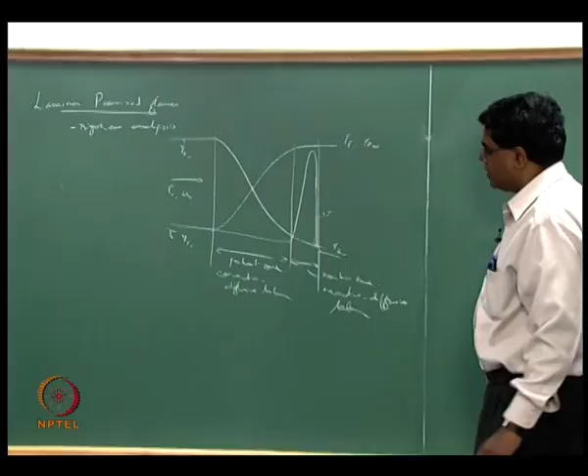So today what we will do is try to actually make a mathematically rigorous analysis of the laminar premixed flame problem. What we have been doing so far is somewhat like a phenomenological construction of energy balance and mass balance, looking at the preheat zone and the reaction zone separately. In fact, we went all the way up to even considering not only upstream diffusion of products and consequently a downstream reduction of reactant species concentration relative to the far upstream reactant concentration. We also took into account the effect of non-unity Lewis number of the reactants in trying to find out how the reactant concentration profiles are going to change because of that.

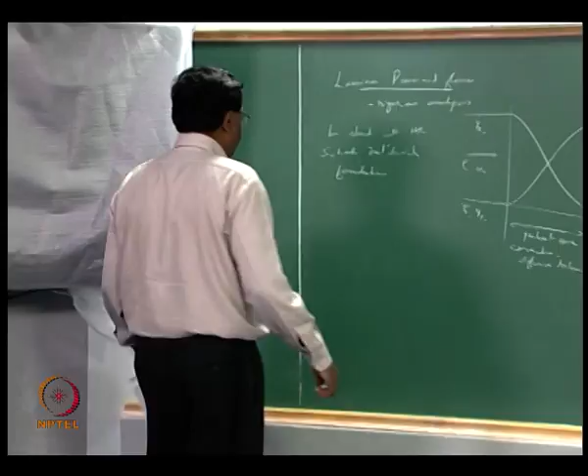But however, when you are now doing the rigorous analysis, we start with the Schvab-Zeldovich formulation, which means we have to go along with the 11 assumptions that are attendant to the Schvab-Zeldovich formulation, and then we make further assumptions, hopefully only a few, that is particular to this problem. So further assumptions. The first thing that we make is a somewhat peculiar simplifying assumption which could be relaxed.

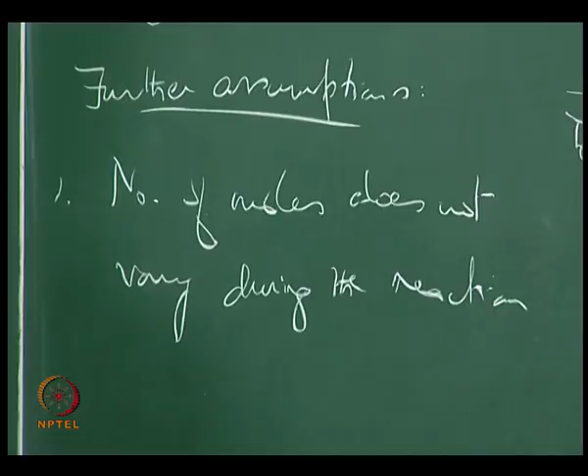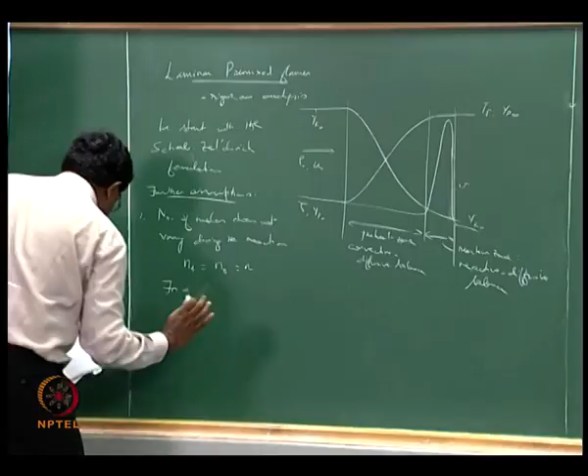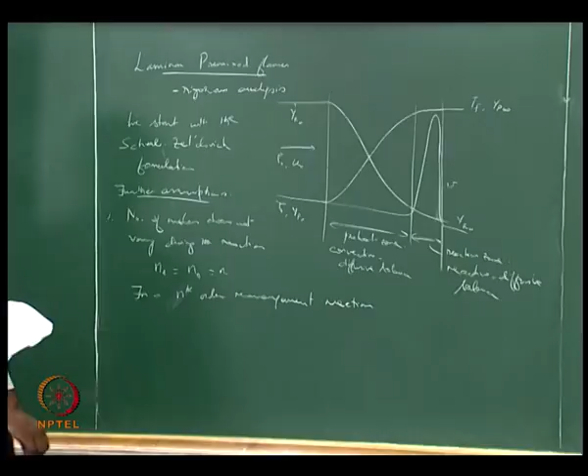Number of moles does not vary during the reaction. So let us suppose that we have Na equals Nb equals N, and this corresponds to saying, for example, for an nth order rearrangement reaction, such as A goes to B, when you now say Na equal to Nb, then this actually implies that Wa equal to Wb. So what basically happens is your mass fractions and mole fractions are equal, so you don't have to worry about a further equation that relates mass fractions and mole fractions.

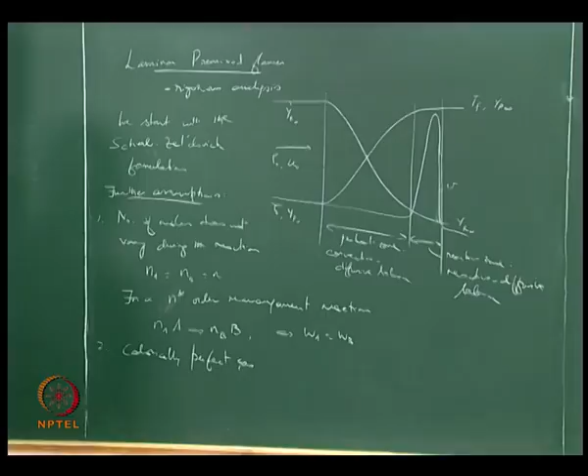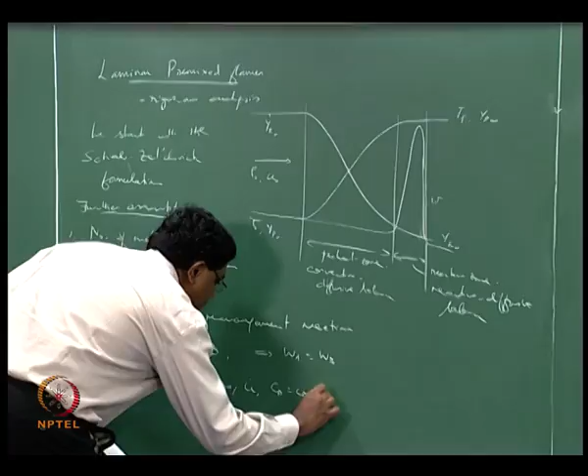Second is we assume a calorically perfect gas. Now notice that we did not make this assumption as part of the Schvab-Zeldovich formulation. We could still deal with an integral from T reference to T of Cp dT in the case of Schwab-Zeldovich in general. That means you could assume a temperature varying specific heat, but here we make a calorically perfect gas assumption, that is, Cp equal to constant. Also, essentially we are saying all thermal properties are constant, K is a constant. So let us assume that the thermal conductivity is a constant as well.

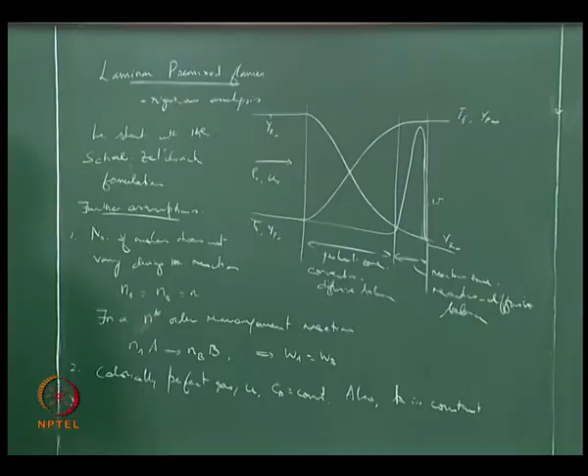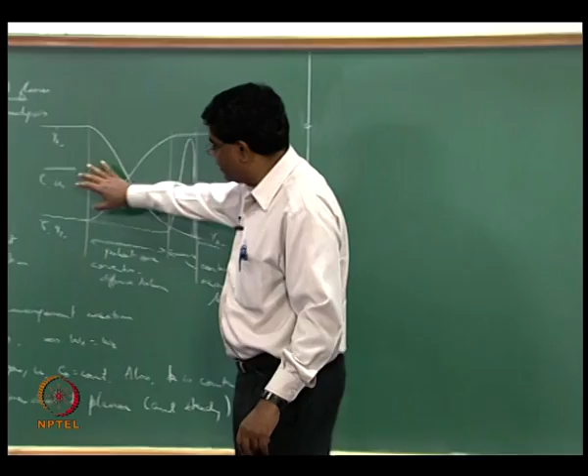Number 3, flame is one dimensional and planar, and steady. Of course, steady state is assumed in the Schwab-Zeldovich, but we just want to point out here that we are looking at a steady flame which is one dimensional and planar. That is the assumption, which is not very unrealistic. If you think about, for example, if you had a slotted Bunsen burner, you could actually have a tent shaped flame, and locally along the side of the tent, like the shoulder of the flame, is reasonably planar. Of course it does not look one dimensional, but we will notice later on that we should be able to take a component of the flow perpendicular to the flame and then treat the flow field across the flame locally like the way we are doing here. So this is a very reasonable assumption. The other ones are obviously simplifying assumptions.

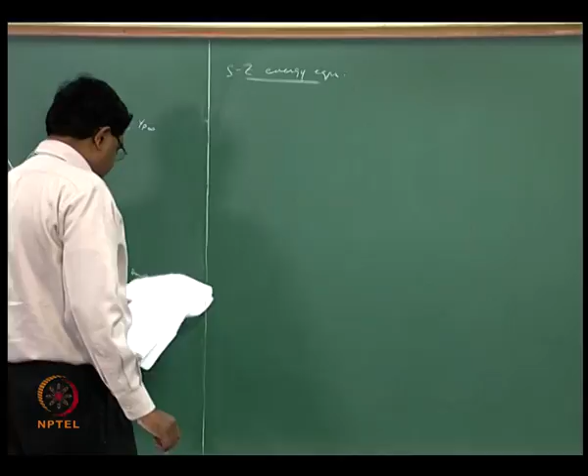So let us now proceed with how we would do the Schwab-Zeldovich energy equation. It goes like, take a divergence of rho v vector integral T superscript naught to T Cp dT minus rho D gradient integral T superscript naught to T Cp dT, equal to minus sigma i equals 1 to n delta hfi naught Wi is what we had. We denote negative sigma i equals 1 to n delta hfi naught Wi as, let us say, Wq.

Now that is kind of like a summation, equal to like reaction rate times the heat of reaction. Of course we are assuming a single step reaction as part of the Schvab-Zeldovich formulation. Of course this was not the final energy equation that we derived in the Schwab-Zeldovich. This is what we had actually termed as the Schwab-Zeldovich energy equation while we were doing the formulation. So it is basically taken right from there. We haven't formed the coupling terms or the alphas and all those things at this stage, but let us suppose that we can just proceed from here and apply this to a one dimensional situation. Then here we can now write this as rho u d by dx of Cp (T minus T naught) minus rho D d squared over dx squared Cp (T minus T naught) equal to Wq.

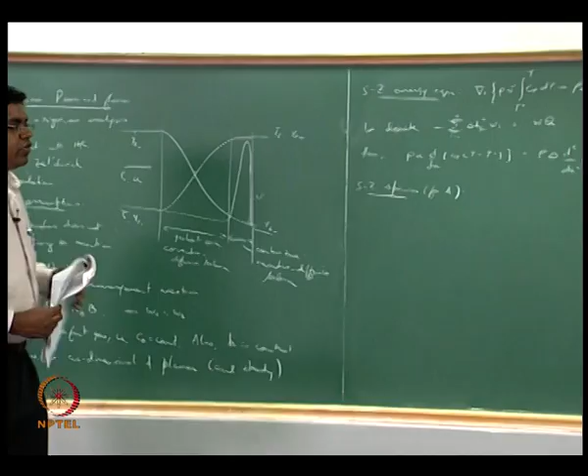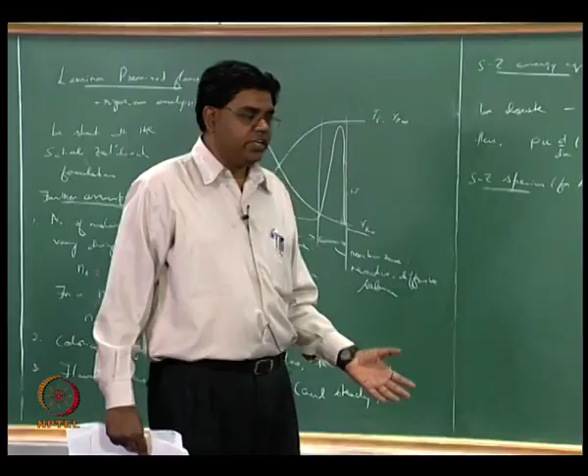Okay. Then we write the Schwab-Zeldovich species equation for species A. Let's say that is the reactant there, and so we now write for this species. Now what you will find when you try to apply the Schvab-Zeldovich formulation is we don't necessarily solve the entire n plus 1 equations that we talked about, where n is the total number of species involved. Although it looked like they were all coupled and we have to solve them simultaneously, what we are actually looking for is for equations to look identical. So if equations begin to look identical, then it is sufficient for us to solve one of the equations that are a part of the identical set instead of having to solve for all the equations simultaneously. So this is how we simplify our lives instead of burdening ourselves with lots of equations to solve.

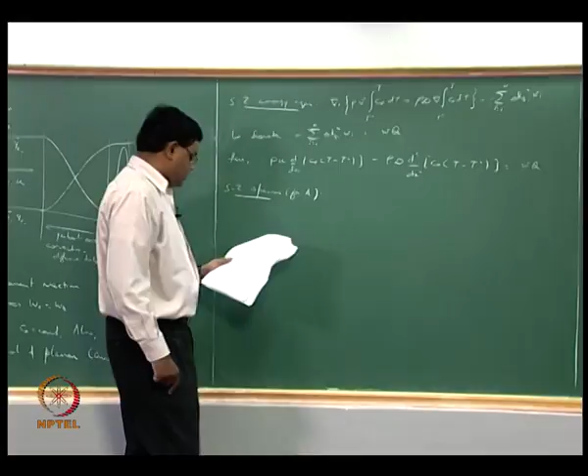So here in the case of the premixed flame, we will see that for the moment it is sufficient for us to take the species A conservation alone. We do not have to worry about lots of other species. So here you have a divergence of rho v YA minus rho d gradient YA equal to WA. Now since you have the same number of moles everywhere, we can point out that WA equal to minus WB equal to minus W, right. So WB is the rate of production of B, WA is the rate of depletion of A, and so the rate of depletion of A should have a negative sign to denote the depletion.

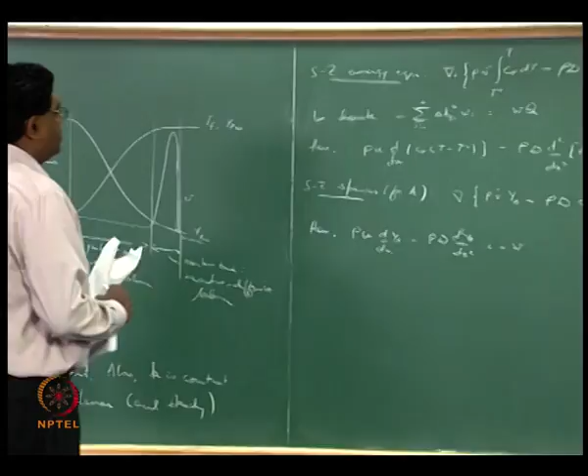If you are now writing it in terms of the general reaction rate W on a mass basis, so here if you try to unwrap the divergence and vector notation, fortunately we do not have an integral to evaluate in this case as in the energy equation, so it should simplify as d by dx of rho u YA minus rho d d squared YA over dx squared equals minus W. As a matter of fact, I should point out that we are also assuming the rho d to be constant, by the way. That's sort of implicitly stated here because we are assuming d to be a constant, and this is like an incompressible flow where the mixture density does not change, and of course we are not even bothering about the mixture density changing with temperature, alright. Therefore we would suggest that rho d is a constant, and we can go through with the divergence all the way to applying the gradient, and therefore you get the second derivative here.

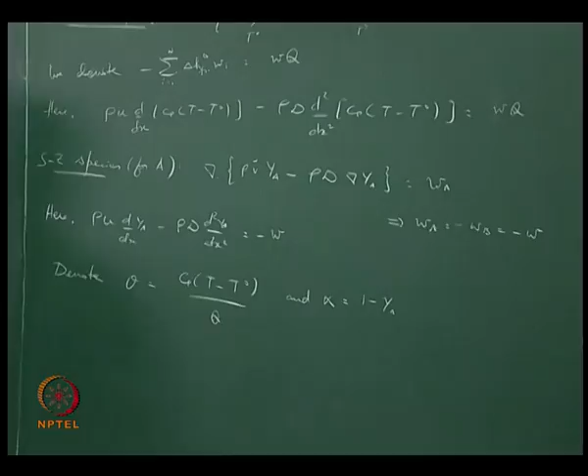Alright, now we want to see if these two equations are looking alike in some way, and this is what we also tried to do when we did the Schvab-Zeldovich formulation anyway, right. So here if you denote theta equal to Cp (T minus T naught) divided by Q, and alpha equals 1 minus YA. This is pretty interesting actually, because well, this is kind of obvious.

We want to get the Q down here, okay, and then you have essentially T is the one that is varying, Cp is a constant, T naught is a constant, but you have this T with all this paraphernalia like Cp times T minus T naught together, and so we want to say that's like the variable now instead of the actual variable temperature, and then we get this Q down here so that it will also have a W just there on the right hand side, just as well as the species equation, but the species equation has a negative sign for the W. Therefore if you want to have only a W there, all you need to do is to multiply this by a negative sign on the left hand side. That means we should have actually been saying alpha is equal to minus YA, not 1 minus YA.

So why were we looking at 1 minus YA? This is a trick, okay, that is not really highlighted in textbooks and so on. What we are basically looking for is something physical. Look at how we actually proceeded in the phenomenological development of the structure of the premixed flame. That was the key.

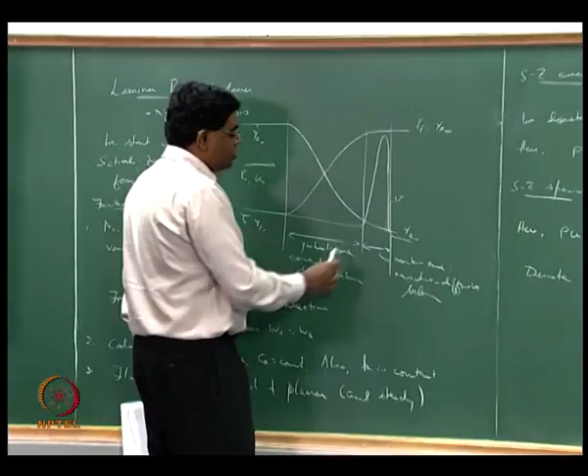We noticed that the temperature profile goes like this, and then we started asking questions about how the product profile would look, right? And then we came to the conclusion that if most of the products are actually produced here, we should anticipate that the product concentrations should grow only over here. But once the products are formed, they kind of look around and see, hey, I am actually a lot over here and I am getting convected down there, so I am also there.

The only place that I am not around is here, therefore can I diffuse? But I am getting convected down. So there is a balance of how much upstream diffusion the products can do versus the downstream convection that they experience, and that would give rise to a concentration profile that becomes pretty much identical to the temperature profile in the event of a Lewis number equal to 1, which is assumed in the Schvab-Zeldovich formulation, right? So then we realize that the product species also goes through a convective-diffusive balance

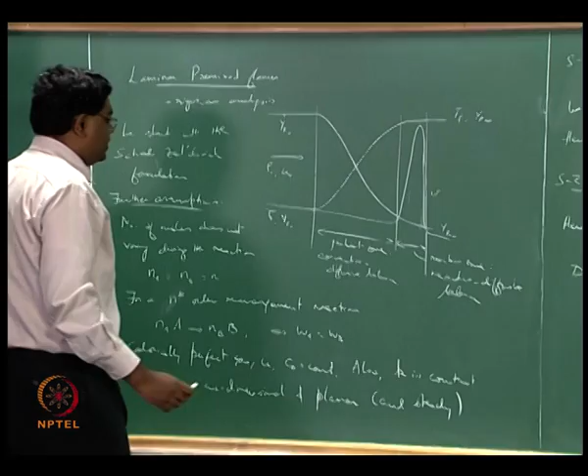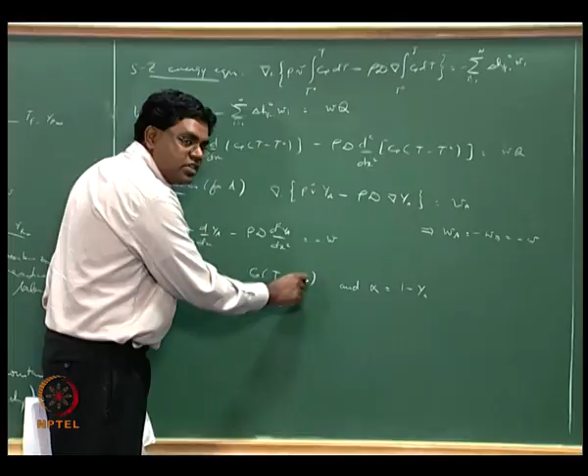in what we thought was the preheat zone for only the thermal balance earlier. And so we anticipate that the product concentrations should look pretty much like the temperature profile if you normalize in certain ways, right? So how would you normalize? This looks like a normalized temperature in some sense, not exactly T superscript naught, which is the standard temperature. We should have actually put T subscript naught for the initial temperature, then this would have looked like a normalized temperature, and I will come to that pretty soon.

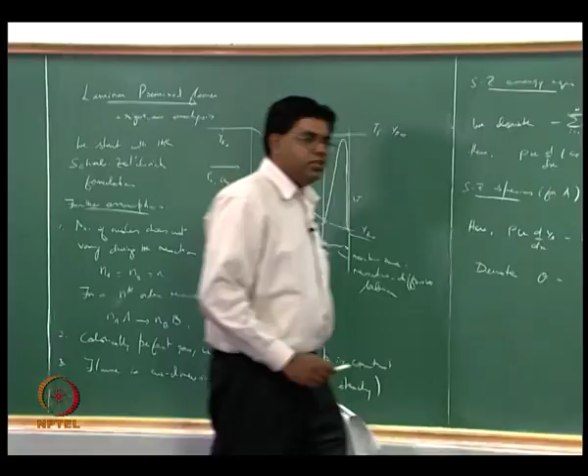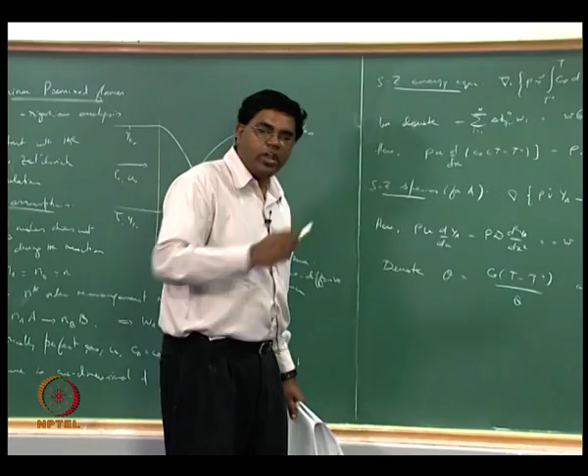But this one, instead of just saying alpha is equal to minus Y_A, which would have done the job for us here to make this look similar to that with T replaced by theta through this transformation, we are actually saying 1 minus Y_A, because alpha now begins to act like the product species concentration, right? So if I had only two species, let's say A and B, you can clearly see that Y_B would be 1 minus Y_A, right? If you had multiple species, it didn't matter; finally you are going to have something out of which you are subtracting Y_A, so 1 minus Y_A will do the trick for you to have alpha go more like the product, you see. So that's essentially the idea here.

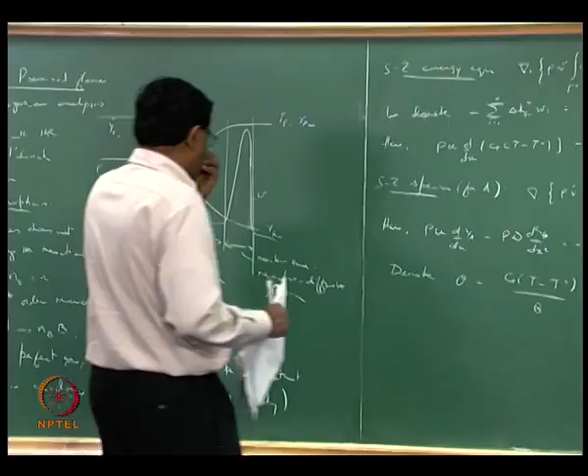So we are looking for the equations to look similar by choosing a transformation, if you want to call it that, for the reactant species concentration that will mimic the product variation, because that's how we develop the phenomenological understanding of how upstream product diffusion causes a downstream reactant depletion through diffusion.

So yes, the pressure remains constant in the flame, and we have taken rho to be constant, so how is temperature varying? Yes, the effect of that is going to be felt in the flow. What will happen is, if you really have a density that depends on temperature, then your mass balance is going to get affected. So when you say that rho u is equal to a constant, if rho changes with temperature, your u is going to accelerate, right?

That is something that we noticed in the Rankine-Hugoniot formulation, that across the deflagration the flow accelerates, right? So 1 over rho increases, so rho decreases, and therefore T should increase anyway, and then u will also increase. All that stuff is correct, but in the Schvab-Zeldovich formulation we are adopting a given flow field, and the given flow field here is a uniform flow field. That means no matter what the constituents or the composition of the mixture are, as we go from the reactants to the products through the flame, the mixture as a whole has only the same velocity. We are ignoring the fact that the flow is going to accelerate. It's as if we are not interested in it, we are not worried about it, okay.

Correspondingly, we can go with a constant density situation, or we don't explicitly state that rho D is a constant and then start thinking about why D should vary with rho in a way that rho D is constant and so on. That's not exactly the way it is justified, okay. The way it is justified is that we are basically thinking about an incompressible mixture, and we are violating the perfect gas law, but that violation is more felt downstream of the flame, when our business is over, so we don't worry about it, okay.

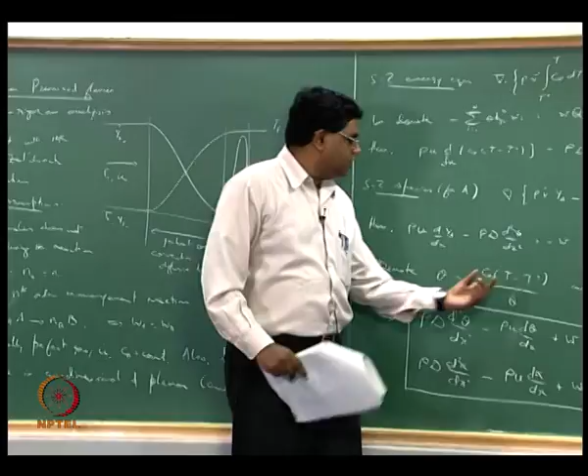Cold boundary, that is x equals minus infinity: alpha is equal to 0, theta equal to 0, supposing T superscript naught as T naught, without loss of generality. Because I could have written this as T minus T naught, plus T naught minus T superscript naught. So I could have added and subtracted my actual initial temperature. That's essentially saying I have a sensible enthalpy initially above the reference value for the reactants, that is going to be added over here, which is a constant, and therefore it is not going to really affect me at all.

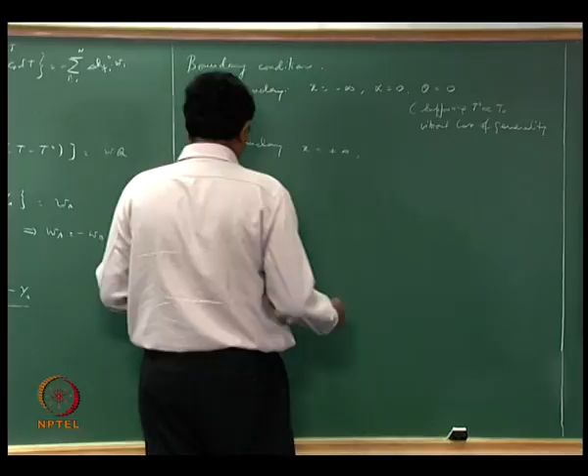So I could say that effectively T is whatever it is, and then say theta is equal to 0 and alpha is also equal to 0, because I am assuming that I have all of them as reactants upstream, and then Y_a should be equal to 1. Hot boundary, x equals plus infinity: theta will now give you Cp times T_f minus T naught divided by Q, and alpha should be equal to 1, since Y_a goes to 0, all the reactants getting consumed in the flame. But what is theta?

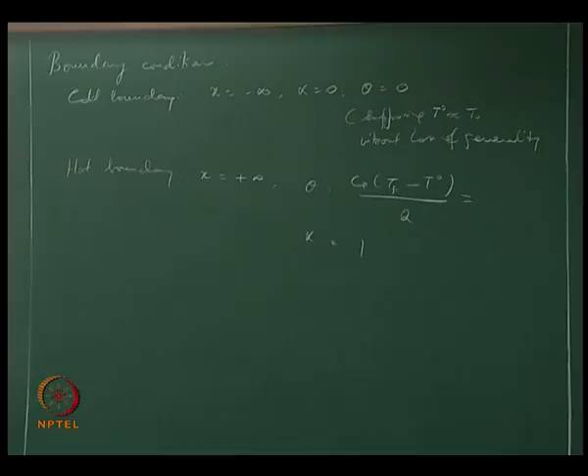You get this funny expression there. Can we evaluate it? That's equal to 1. Okay, that is because of the adiabatic flame temperature. In the case of an adiabatic flame temperature, this is the heat that is released in the chemical reaction, and all the heat that is released in the chemical reaction goes to increasing the sensible enthalpy of the mixture. That is what an adiabatic reaction flame is all about.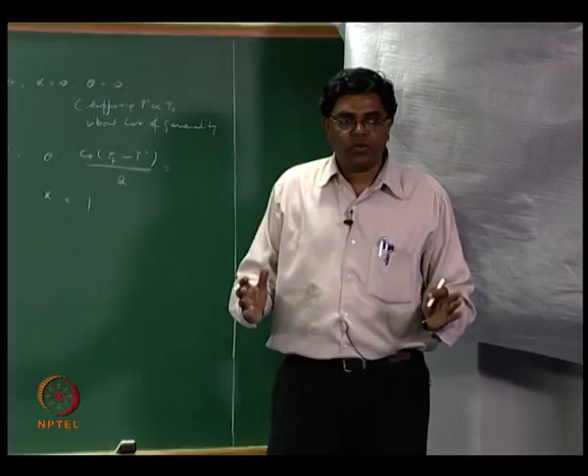Okay, so Cp(Tf minus T naught) is a sensible enthalpy rise of the mixture, which is primarily coming from Q, and therefore this is also equal to 1. Lo and behold, the boundary conditions are also identical. Wow, we made such a big fuss about n plus 1 equations in the combustion problem, and then we belabored a lot to get the Schvab-Zeldovich formulation going, and we still had to get stuck with n plus 1 equations, n of which were fortunately homogeneous, and finally we are able to actually get to 2 equations that we just pick out of them, and then we find that both of them are identical and the boundary conditions are also identical, therefore it is sufficient for us to solve only one equation.

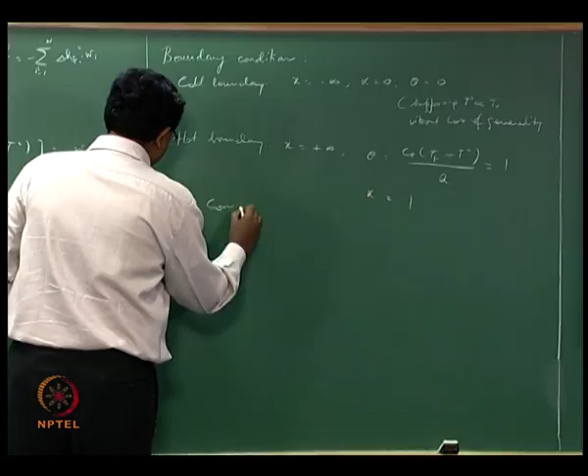Great progress, right. So therefore, considering one equation is sufficient.

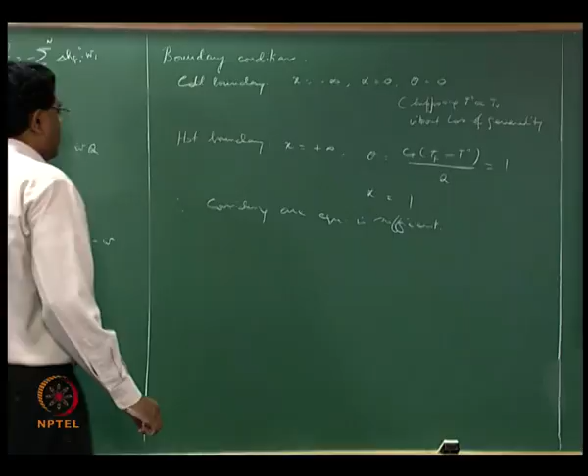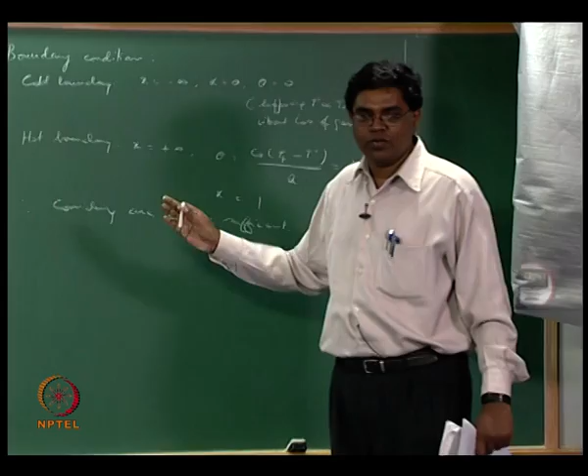If you were to still persist and say, well, theta should be equal to a alpha plus b, and you can substitute the boundary conditions for alpha and then plug in values of theta and alpha, there you will find that a is equal to 1 and b is equal to 0, alright. So then you will be able to show that theta is equal to alpha. So that's mathematically showing things.

Okay, so what we want to do now is get confronted by that one equation. Let us say we take the one that is written first, and then we want to deal with this, and we want to see how to solve this, right. For the first time in our lives as combustion students, we are going to solve something. So far we have been only posing problems. Okay, oh my god, how do I solve this?

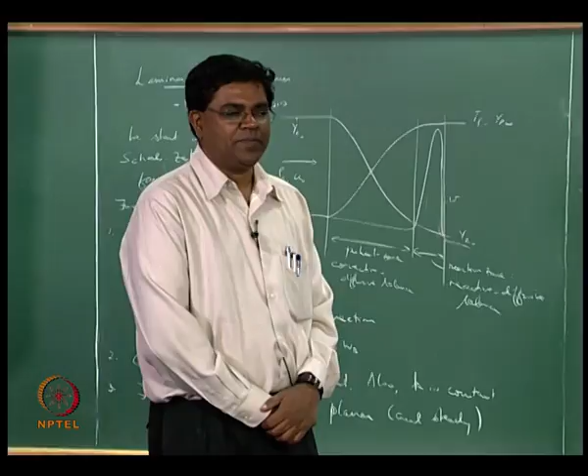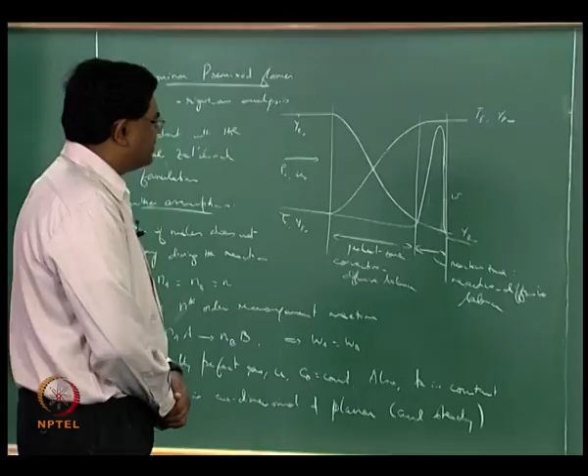What is the problem? That is a second order ordinary differential equation with constant coefficients, as a matter of fact. Okay, rho D is a constant, rho u is a constant, and then it's an inhomogeneous equation, all right. Okay, what is the inhomogeneity all about? You have the W, that is the chemical reaction rate, and you have the theta there through the temperature sitting in the denominator on top of an exponent with a negative sign. Okay. So that is the ugly looking expression that has been camouflaged by a simple W there, you see, and that has been the one that we have been really feeling jittery about all these years, and there we are, we have to solve.

So how do you do this? Chicken out of the problem. Say, well, can I look at the flame where you don't have a W? Right? Yeah, sure, of course. So you get into the flame, you now with a lot of trepidation you get into the flame, and then still no W. Oh sure, fine, this looks great. So I get in there and then no W at all for quite some time. So I can solve that.

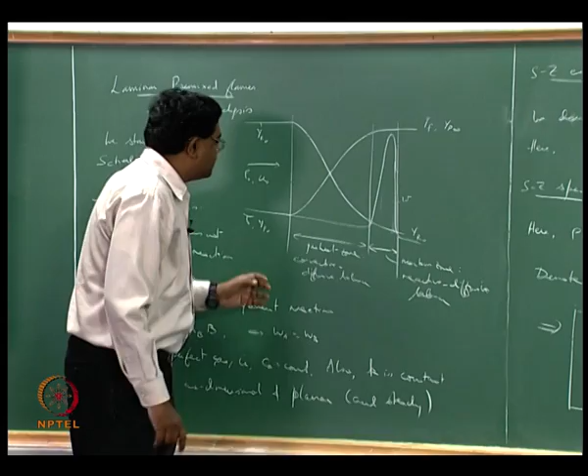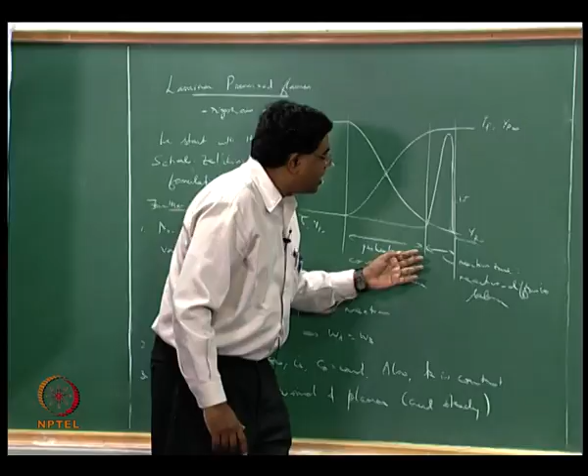Can I? So what we would do is we now begin to notice the way we were talking about things earlier, that you have a flame with a preheat zone with hardly any W, where I could actually go ahead and jolly well solve this, and then I have to look at this region where I have to confront the W and then point out that you pretty much have nearly the same enthalpy for the incoming species and the outgoing species, so you don't really have a convective enthalpy flux to worry about, and therefore I am going to get rid of this, right, and I am going to look at a reactive diffusive balance and then try to integrate that, right.

Why, I mean, we still have to take this W into account ultimately, so what's the big deal? The answer is, what is it that we are actually looking for out of this equation? Can we now find out what exactly our problem is? What is the one single quantity that we are trying to solve for?

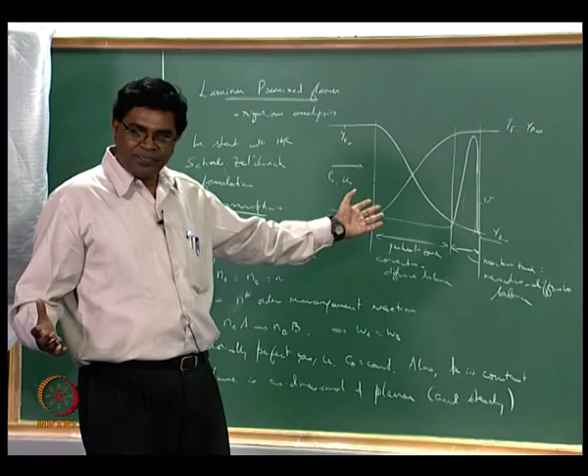Do you know what the problem is in our lives? We don't know the flame speed. Okay, so although this is a very innocent looking constant that's been pulled out, we don't know what the U is, right. So what this actually allows us to do is, we can say, while I am in the convective diffusive balance, I keep the U, which is what I don't know, right, and then it turns out to be like an eigenvalue problem.

So an eigenvalue problem is where you have one of the coefficients that's an unknown and you supply the boundary conditions, and then it turns out that the boundary conditions aren't sufficient for you to actually evaluate the eigenvalue, right. So in this case what you do is you retain this in one of the regions and you get rid of it in the other region where you have to confront the W. So you are kind of breaking your problem into two parts, divide and rule, right. This was my problem, this was my unknown, keep the unknown, get rid of the problem in one, and keep the problematic thing and get rid of the unknown in the other. I should be able to handle this, but what's the catch?

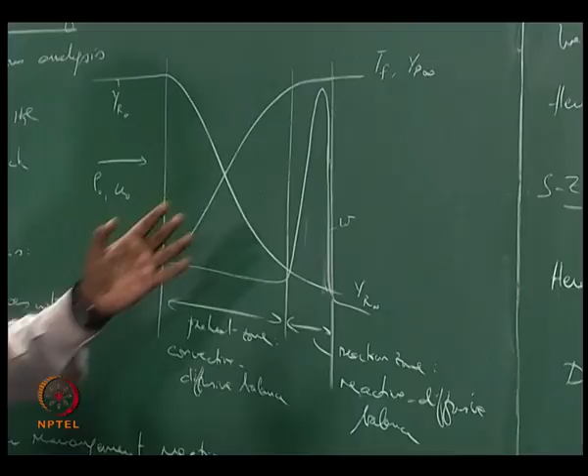I solve for this, and it is going to still need two boundary conditions because it's second order, right, and my zone is only from here to here, right, and strictly speaking I don't know exactly where to draw this line, alright. It's sort of like as I keep on entering into this region and the chemical reactions are happening somewhere, I suddenly feel too hot and say, I think I have got into the reaction zone. So it's a feel, right, I don't know exactly where it is and I need a boundary condition there where I don't even know where the boundary is.

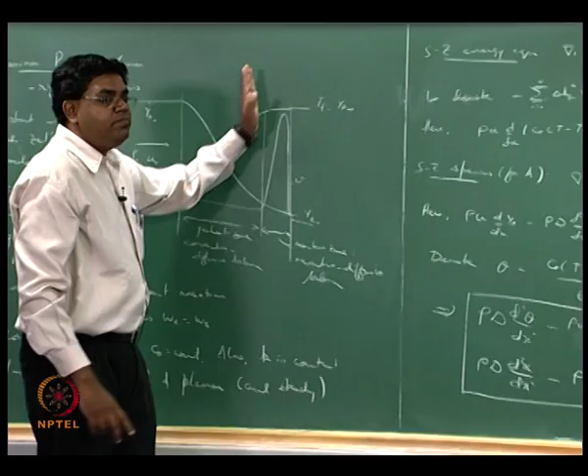Okay, and look at this part, right. If I now want to keep this and that, I still am not throwing out the leading order term, which means it is still a second order equation and I need two boundary conditions, and the boundaries are this fuzzy boundary somewhere here and the far downstream boundary. Okay, but all we have stated so far is I knew what the boundary condition is here, I knew what the boundary condition is there.

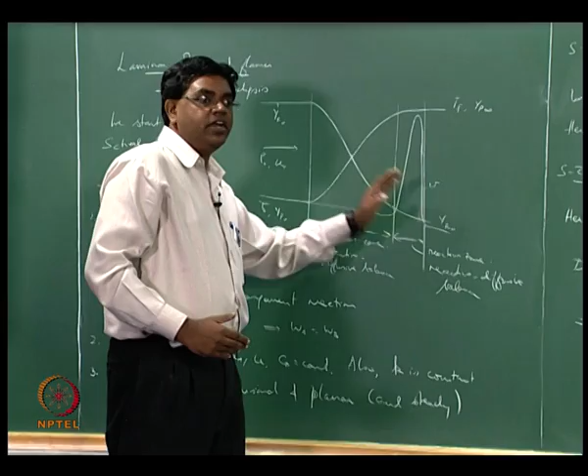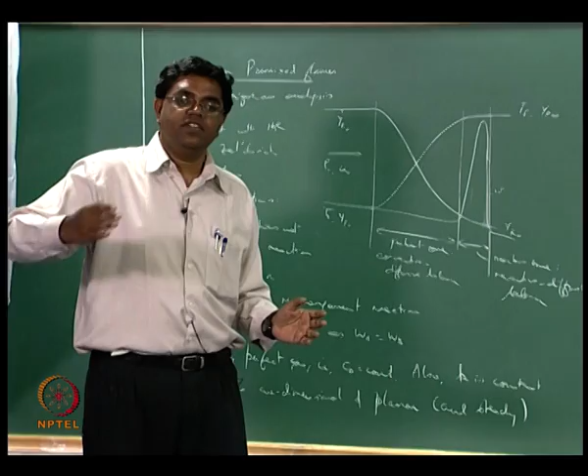So what do we have to do here? We have to now come up with two boundary conditions because it's second order, which are shared by these two. So that's what is called interface conditions. So that's an interface between two zones and we have to supply two conditions that are shared by these two. Okay, and whenever we are looking for two conditions, it's because it's second order, and if it is second order then we are looking for two conditions, one in the value and the other one in the first derivative. And in fluid mechanics the first derivative mostly has some significance in the sense the first derivative is going to deal with the heat flux, the value itself is going to be the temperature.

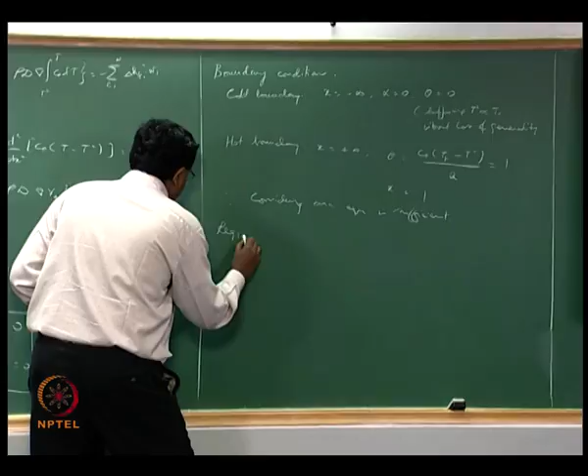Okay, so we will go through these steps rather quickly in a mathematical way. So region 1 is our convective diffusive balance, right, convective diffusive zone, which implies that W is approximately equal to 0 and then we can write d squared T over dx squared, we can go back to T, don't worry about theta anymore, that was just to show that theta and alpha are the same. You can go back to an equation that's over there. So d squared T over dx squared minus rho u cp over k dT over dx is approximately equal to 0.

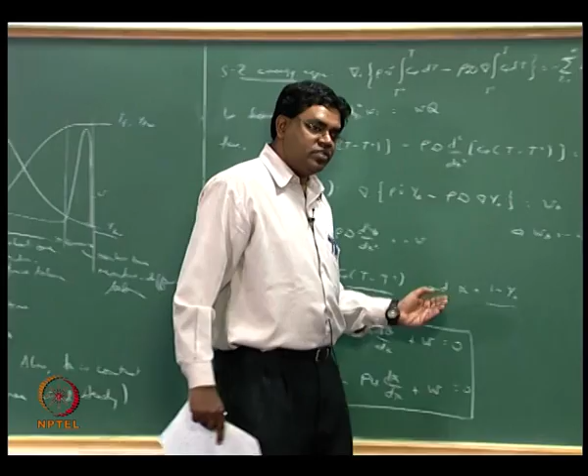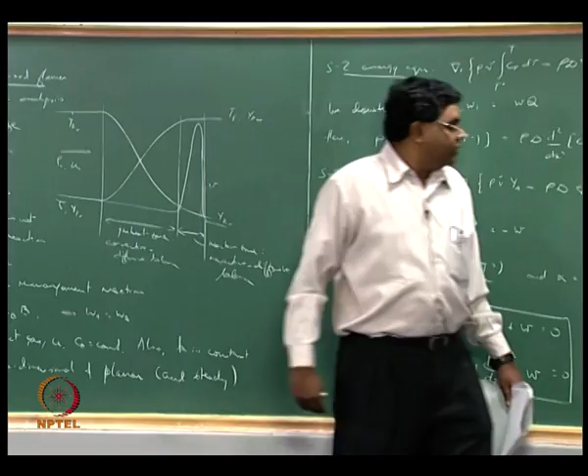Now when you say this is approximately equal to 0, this equation is what is called the 0th order equation. So what we are actually doing is part of a larger approach called asymptotic matching, okay, or what's called matched asymptotic expansions. Strictly speaking, what we should say is the temperature profile can be expressed as an asymptotic expansion, alright, and we now try to take what's called the 0th order, where whatever is a small quantity in the equation is set identically equal to 0. It is not exactly 0, right. You do have the temperature rise and you strictly speaking have a reaction rate that is beginning to increase. Fortunately for us, if the E is large, it is going to get confined to a smaller region, okay. So that is what we are really counting on, but it is approximate.

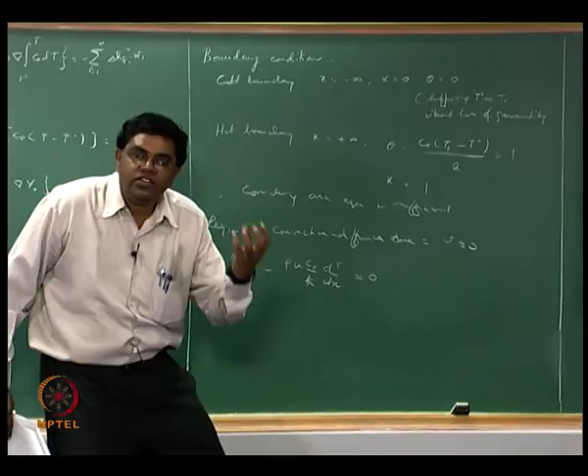So to leading order, to 0th order, we now set it identically equal to 0, get rid of it from the equation. In the first order we have to refine the equation by keeping that small value, you see, we will not do that fortunately, okay, we will not do that, we will just do only the 0th order matching.

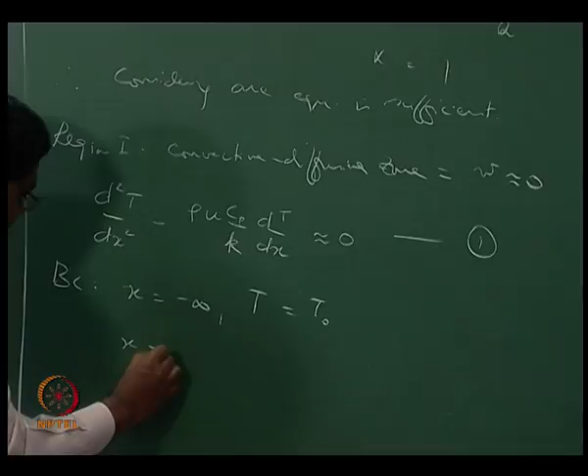So let's call this equation 1, and the boundary conditions here, as we talked about, we want to retain the cold boundary conditions, which is T equals T naught at x equals minus infinity. So we are now locating our x equal to 0 at the edge of the preheat zone, reaction zone match, and we want to call this x equal to 0 minus, T equals Ti.

Many times we are tempted to think that i stands for ignition temperature, and then we are always looking for what's called an ignition temperature. That is a popular engineering notion. Mathematically speaking, we have to confront a cold boundary difficulty, that you have reactions happening even there, it's just simply not significant enough. As far as here, Ti is unknown actually.

It's not like we are going to plug in a value there that's somewhere in between the room temperature and flame temperature. That's not what you're going to do. It's an unknown. It's a temperature that's going to be shared as the upstream boundary condition for the reaction zone, and it's an unknown. So that's region 1 for you. Region 2 is

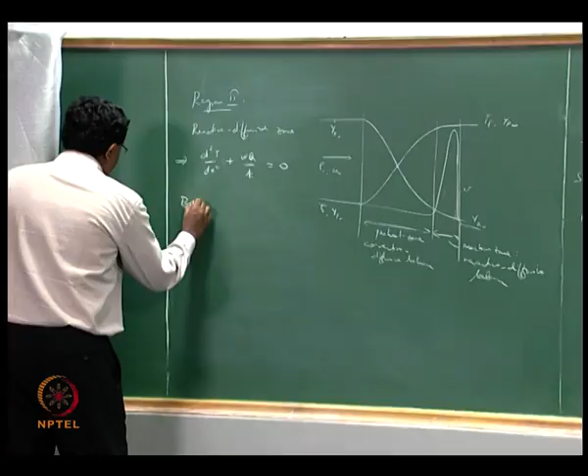So the boundary condition here, we can easily write the hot boundary condition, which is x equal to infinity, we can say T equals Tf, that's what we had started with. But then the interface condition is x equals 0 plus, we have to write the same, T equals Ti, which is an unknown.

Now if you are a little bit more careful, you would probably want to write this equation for region 1 as d squared T1 over dx squared minus rho u cp over k dT1 over dx, and then write these as T1 equal to T naught and T1 equal to Ti. You can plug in a T2 here, and then finally say at the interface T1 should be equal to T2 and so on. But we understand that ultimately it's going to be a single temperature profile that we are interested in.

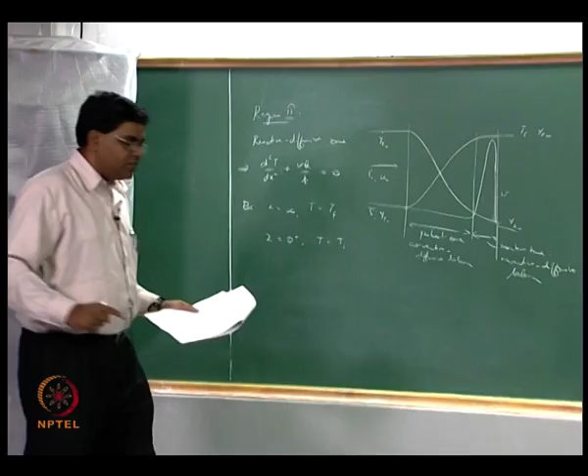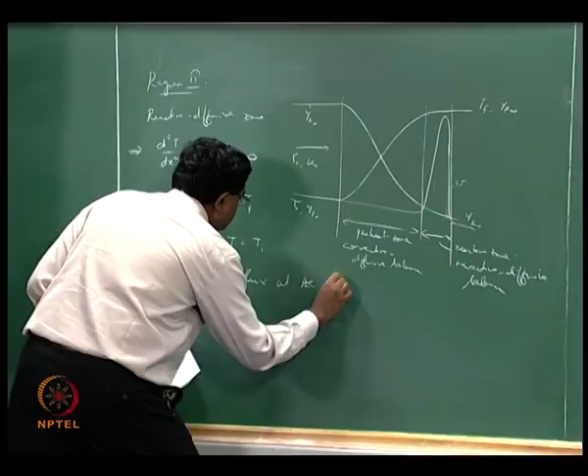And then we said that we wanted to have one more boundary condition at the interface that needs to be shared, and since it's a second order equation, we can go up to the first order. The first derivative is signifying heat flux, and therefore what this really means is matching heat flux at the interface between the two regions. We get dT over dx at x equal to 0 minus should be equal to dT over dx at x equals 0 plus.

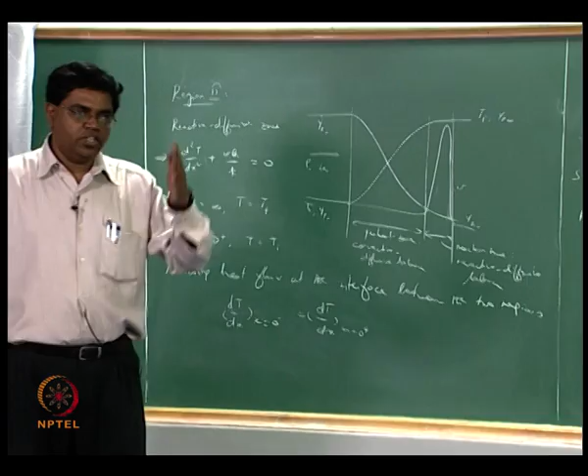Well, strictly speaking we should say k dT by dx, but since it's the same species and as you go to 0 from both sides, it's essentially the same location, the k's are the same, so we don't have to worry about it. But these gradients are coming out of two different solutions, and we are going to force these two solutions to have the same gradient at this point. What that really means for you is, keep in mind what we were talking about for the characteristic length scales for thermal

balance in the preheat zone versus the species mass in this zone. When we were looking at non-unity Lewis number the other day, we pointed out that if you were to just bother about the preheat zone only here and then take an equation that looks like this with a 0 on the right hand side, you can actually solve this, but what you will find is you will get a solution that kind of goes like this and then goes exponentially there.

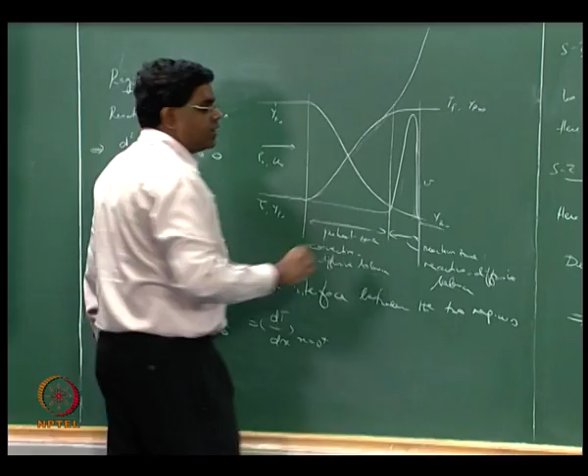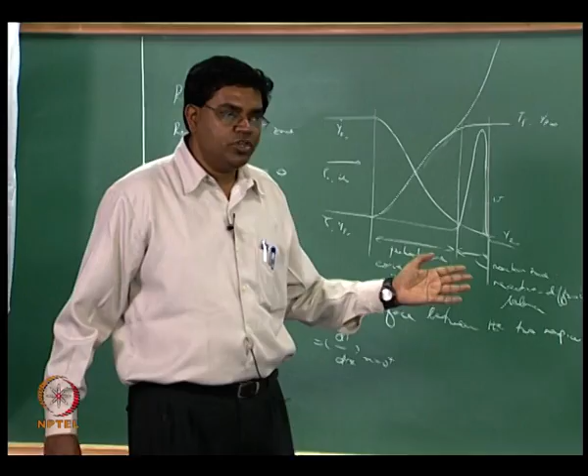For x greater than 0, which is outside the domain of validity of this equation, if you were to extend the solution that you're going to get for your T1 of x, you're going to get a solution that goes exponentially. That's what a second order homogeneous equation is going to look like. You try to solve this, you will get exponents. On the other hand, what we are talking about in this equation, this is also something that you can solve.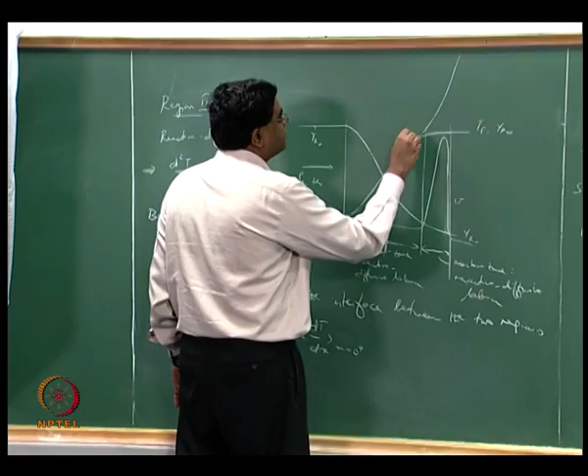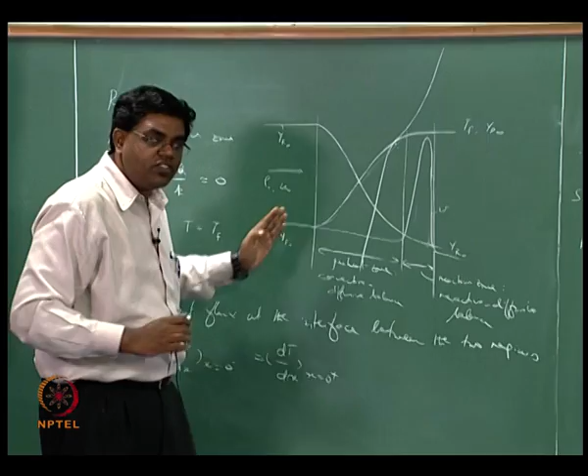What you will find is this is going to actually give rise to something like that, and what we are saying is at this place we want to have the temperatures as well as the slopes match, and that's where we want to position our x equal to 0, somewhere there, right. So this is typically how we want to construct the composite temperature profile in a composite manner, by having

this asymptotic matching. What you're doing here is a zeroth order matching, strictly speaking, because we are identically setting whatever is a small quantity in the equation to 0 and solving for it. So this is the problem, and out of this we are trying to get the velocity u.

We will do the first region and then hold on till next week for the second region with bated breath, I hope, right. We can't wait to get there.

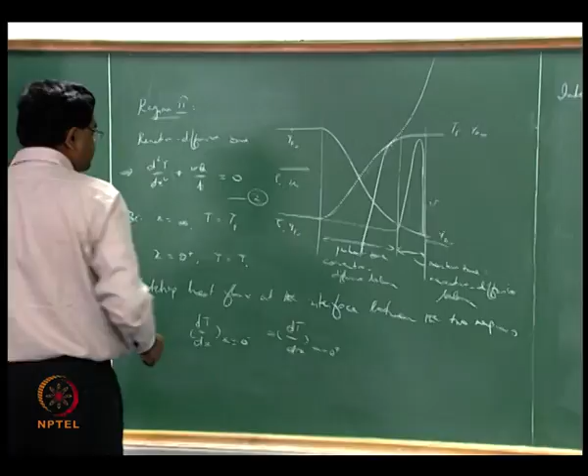So of course we say that this equation is 2, and what we want to do is integrating 1 once, right. We say dT/dx equals rho u divided by k Cp T plus a constant, and we have to supply a boundary condition to satisfy to evaluate this constant of integration.

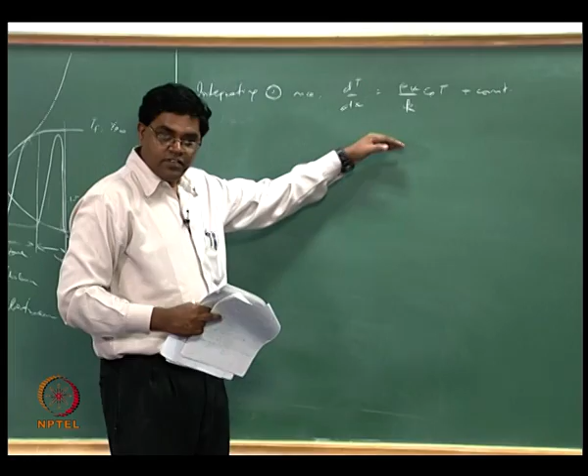One way of doing this is to actually integrate it twice, and then you now deal with two constants and then apply the boundary conditions, right? But I am not going to do that. What I am going to look for is, I am actually interested in dT/dx at 0 minus, okay. So I am not really interested in going ahead with integrating this twice to look at actually the temperature profile. This is a point where the analysis sort of cheats you,

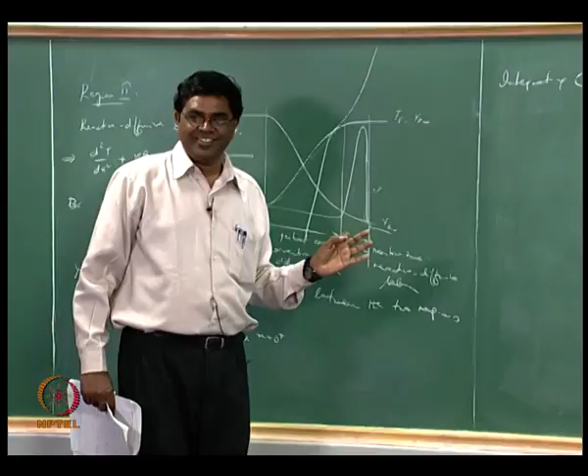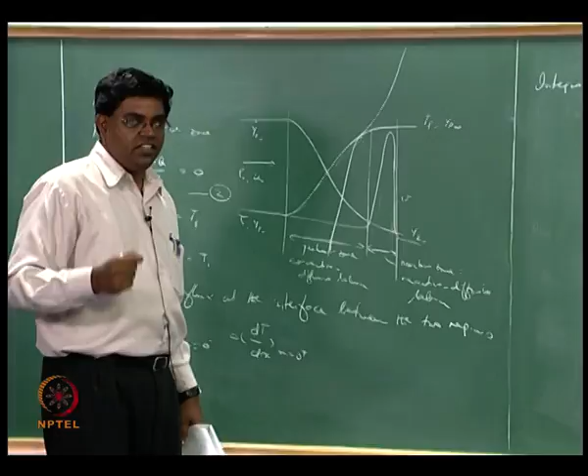okay. So until now we have been talking about these profiles matching and all those things. We are going to think that we will get this matching and get this composite profile, but typically at this stage the analysis abandons its care about the temperature profile. It now starts bothering about the velocity, which is the eigenvalue, right. That is what we are really looking for. So we do not really want to care about getting this and I am stating this explicitly because textbooks do not state this explicitly, and then when you go back to laminar flame analysis to actually look for the temperature profile, you will not find it there.

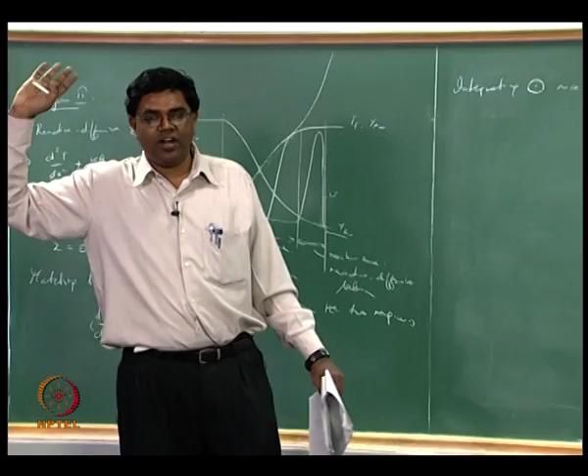Okay, but they say let's just go through this and then get the velocity, put a box around it, then we got laminar flame speed, let's talk about the laminar flame speed and just keep going on. Okay, so unless you go dig up literature further, you can't get this temperature profile. So that's a kind of attitude that you're going to get.

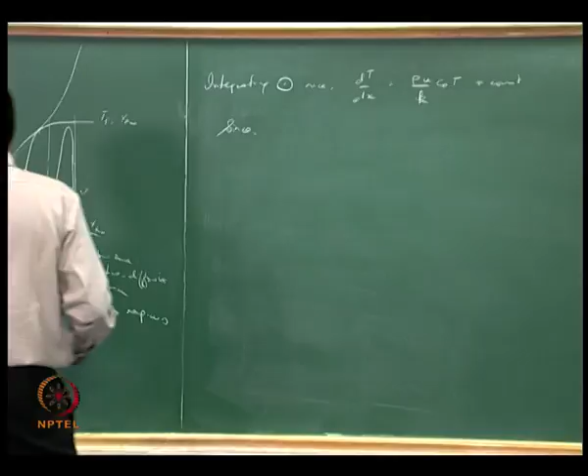So that means we now have to actually evaluate what the dT/dx is far upstream. Since we are saying that far upstream in this region 1, T equals T naught at x equals minus infinity, then T equals T naught for quite some distance there, therefore dT/dx is going to be equal to 0. x equal to minus infinity, T equals T naught, dT/dx equal to 0. This is asymptotically approaching, that is the reason why we are able to actually reduce this, otherwise we can't, okay. So that means dT/dx equal to rho u divided by k Cp (T minus T naught),

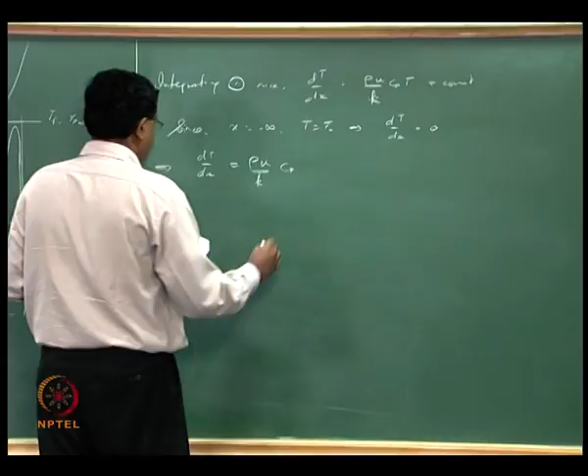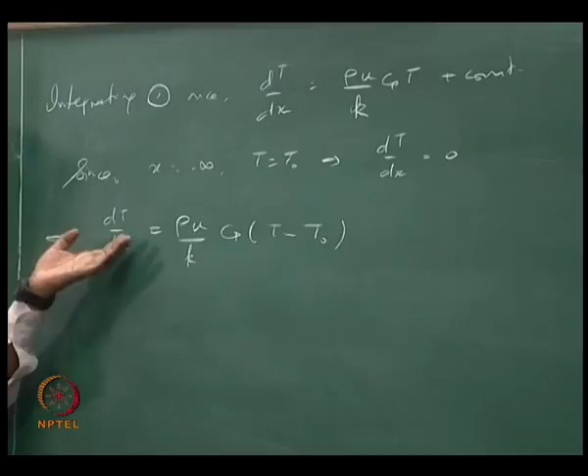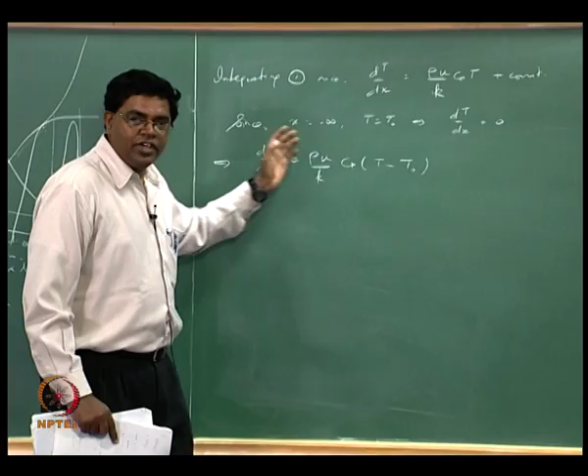right. Now if you think about it, this is the first thing that we wrote in the phenomenological balance. We said that rho u Cp (T minus T naught) is essentially the enthalpy rise that is happening, and that is because of the heat conduction k dT/dx, and we approximated it as k (Tf minus T naught) divided by delta. That is what we did earlier, okay. So whatever we could actually write by just looking at things, if you think about it, takes about an hour for you to get if you go through the mathematics, alright. And there we are, so that is what we got.

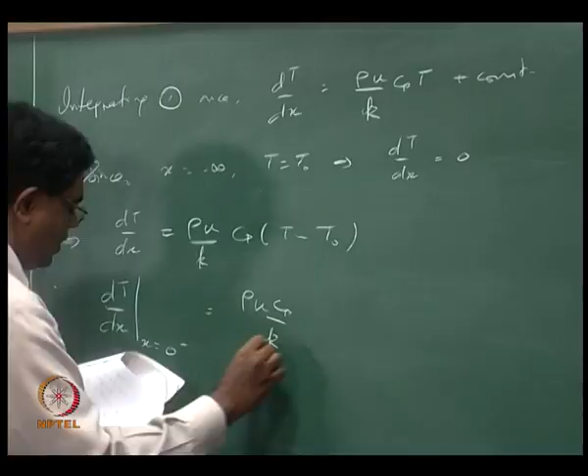Now therefore if you want to now apply this to the other boundary, we now say at x equals 0 minus, this is equal to rho u Cp divided by k (Ti minus T naught). Here we are imposing the next boundary condition, and maybe this is a good point to stop, okay. So we will just say this, we keep in mind we do not know what Ti is, that is an additional problem that we have to worry about, and we will see how to handle this next class.